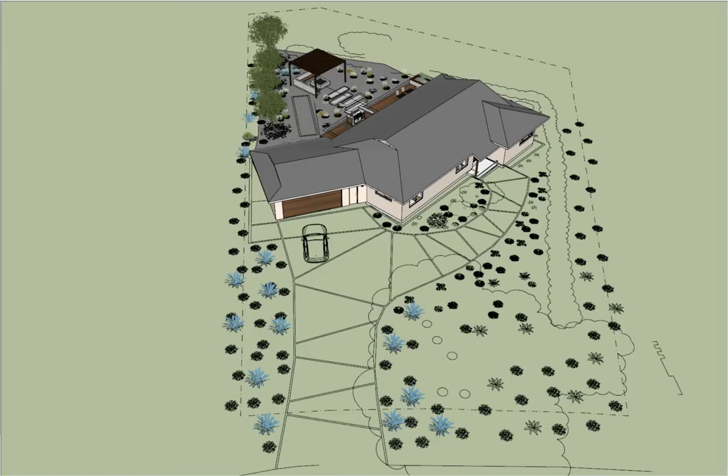Here is a quick preview of the Negrete landscape model. We pretty much have the backyard done, but I just wanted to fly in through the front just to give a sense of what it could look like once we get the plants and things in here as well.

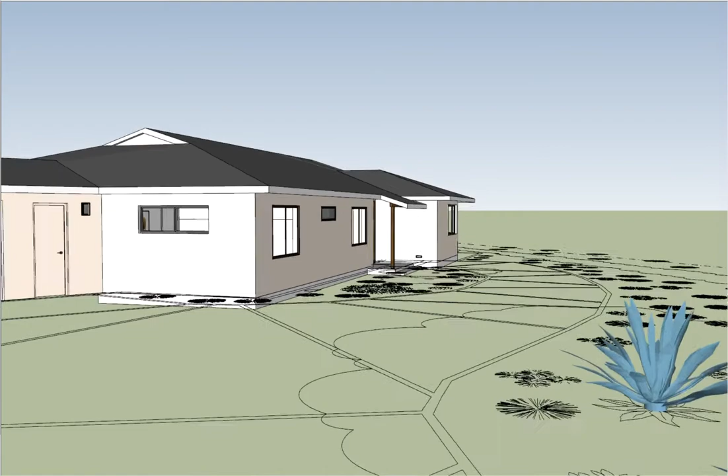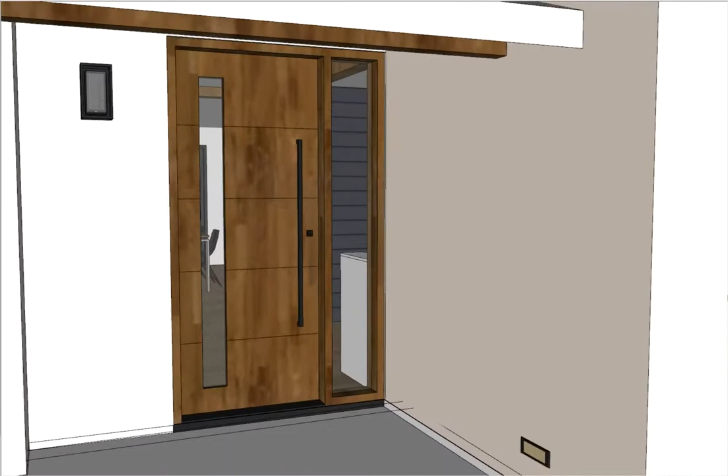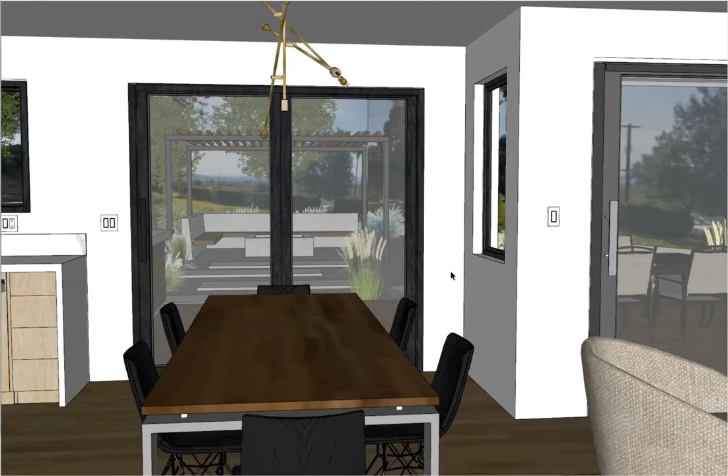I'm just going to walk up the front porch, and I want to go in the front door just to show what it would be like coming in here for the back. So the main axes coming in the front door, we've got the dining room table and the dining room door, which starts to set up the layout of our backyard. You can see the fire pit in the distance there with a pergola.

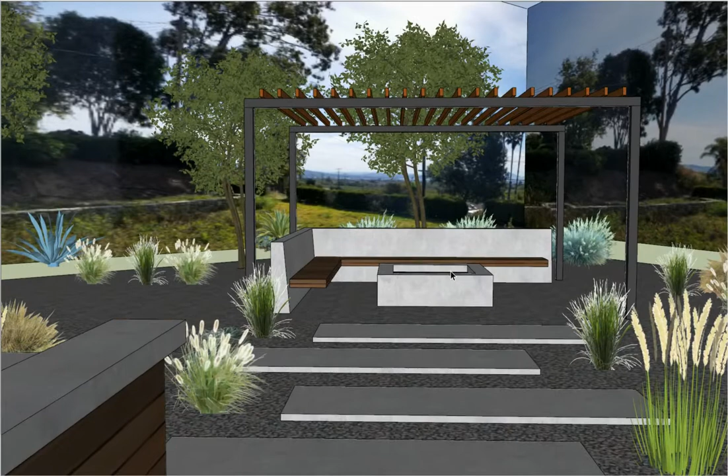And we're going to look at some of the elements of the backyard. So as you come out, here's our fire pit with a bench with concrete and wood and black steel, which sets up the palette for the other elements.

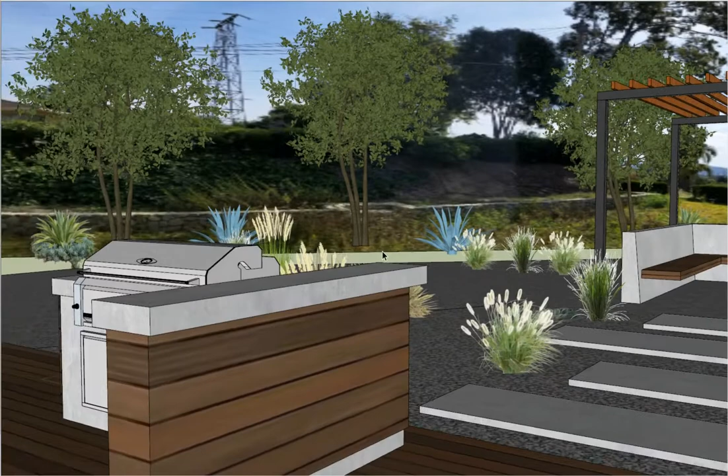So if we pan over a little bit here, we're going to see the barbecue island on the deck, which we're looking at Ipe. So this is a concrete, it's going to be stamped concrete barbecue island, and this is just the wood sheathing on the outside, the same as the deck material.

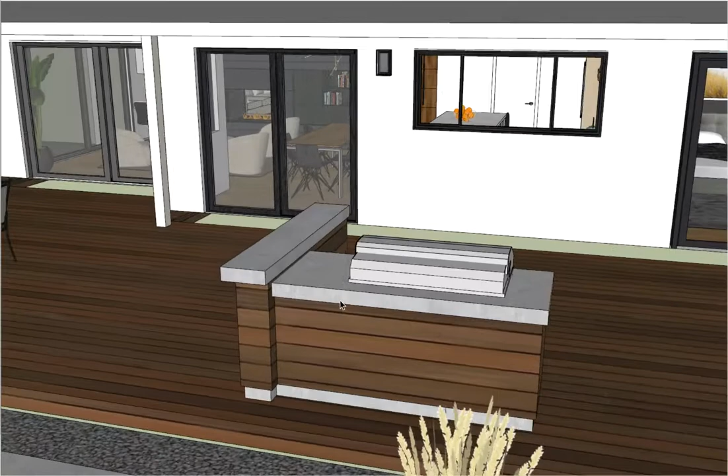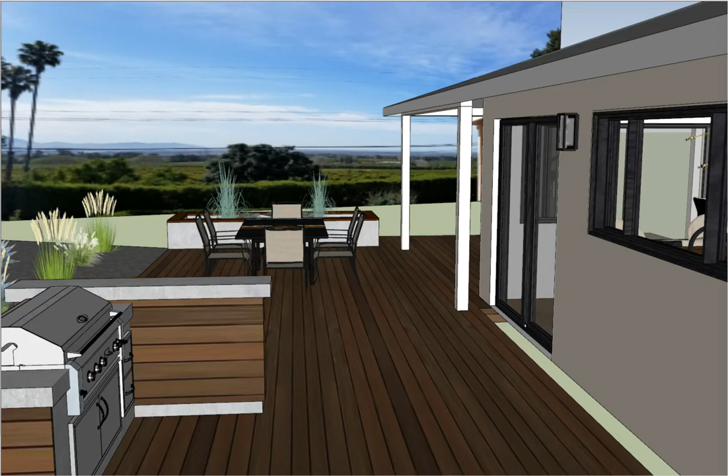Around the barbecue, then we'll move over to the dining room area. Now we're going to be taking a look at some options here for the awning that covers the dining area. So there's the space wall, which is essentially a system that has columns and beams, which allows us a very flat awning to maximize the height out here.

And we're going to be comparing this to the cantilever version. This is the Bella Plus. So we're going to look at the Bella Plus and the space wall, and just as far as what that feels like out here in the space.

So the space wall has the column and the beam, and I think we want to look at how many columns we end up with in the yard when we're looking at putting a pergola out here over the fire pit, and then we start to get more columns in here with the Bella. Let's switch out to, with the space wall. Let's switch out to the Bella, and it just is going to reduce the number of columns that we have there for this.

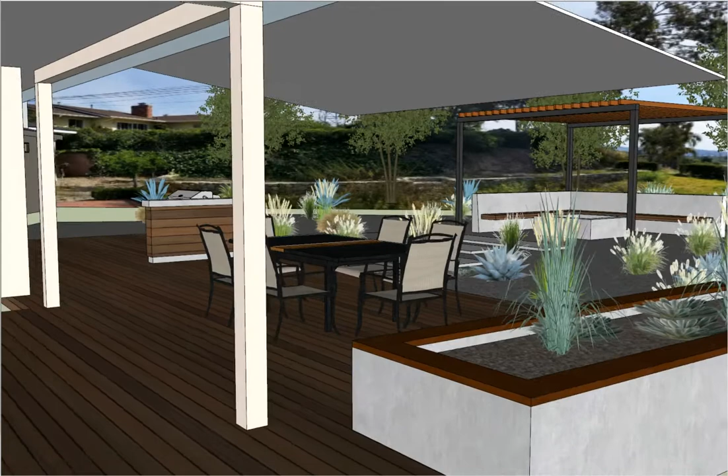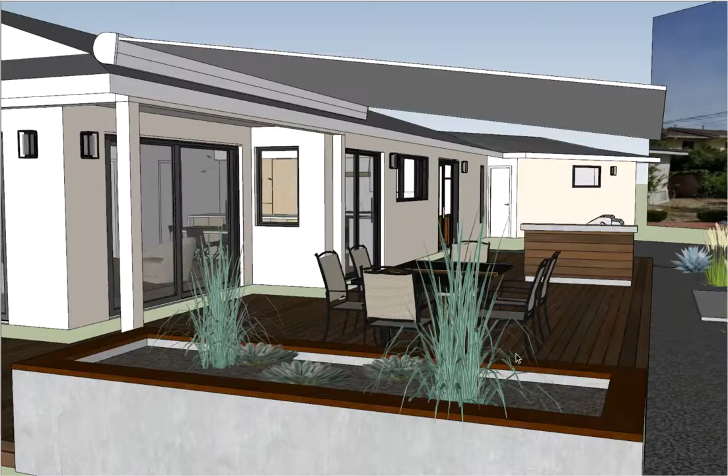So at the end of the deck, we have a concrete planter with a wood trim around the outside. That again is just creating our palette here of the wood and the stamped concrete. So let's stop here and turn on that space wall too, just so we get a sense for the different feel of the two.

I think it gets really significant as we move out here into the yard. We're going to switch again here from the space wall to the Bella. The Bella just disappears when you're out here, particularly, as we're out here in the landscape with the other pergola. I'll switch out again for the space wall.

Here's the space wall looking through the pergola, the garden pergola. Switching back to the Bella. The Bella just disappears. I'm leaning towards that one just because it really, imagine it retracted too, obviously is going to be a lot less.

So while we're out here, let's take a look at this garden fire pit a little bit more. So it just sits out here in the gravel. We've got these concrete steps, or not really steps, they're paving stones, concrete pavers that walk out to the fire pit area. The fire pit has a little 4-foot plinth that's going to carry the fire.

There's going to be gas out here in the fire, and you can see we're picking up again the same wood material in a floating kind of cantilevered bench. The back of the concrete is sloped. Here, let me drop down a little bit more. Pick up the pergola also.

The pergola is black powder coated steel, and then we're just using probably the same wood material as down here, but these are just 2x4s that span across there. Very simple, elegant structure. Let's finish flying around

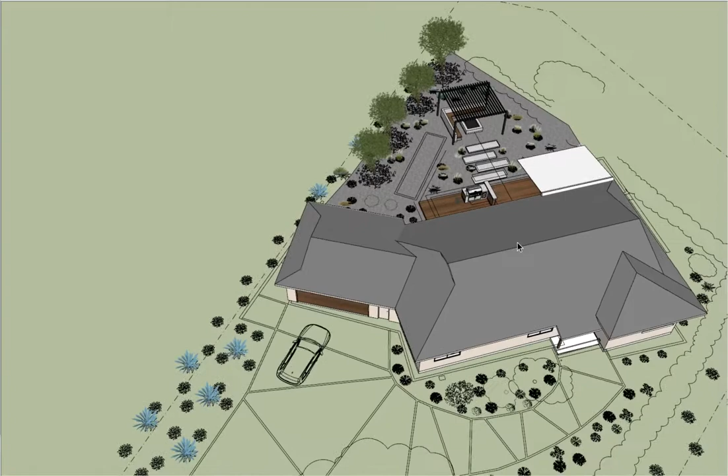So next step is going to be to put the plantings in the front. We want to get this hedge up. It's a real predominant element here in the existing trees a little bit. So that's how the landscape model is looking.